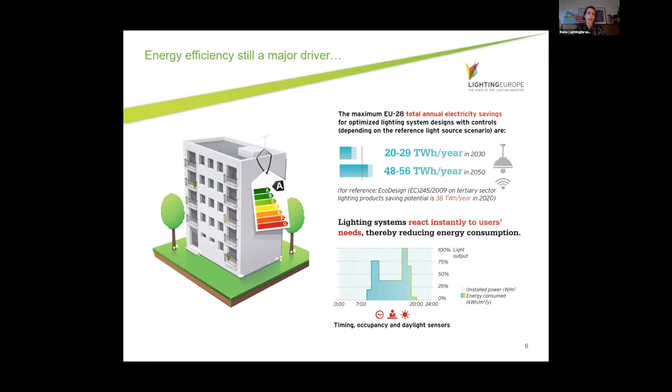But we need to go beyond energy savings, clearly, because in this industry, we have today the science that demonstrates the biological impact of lighting. We know that our circadian rhythm, our body clock, is timed to cycles of light and darkness. And we know that we have the technologies and the products that can deliver those kind of biological benefits also indoors. Now, how to do that, I agree with you, is not always easy, but in LightingEurope, we're convinced that human-centric lighting fostered by intelligent lighting systems will be the next thing for office buildings also. And we expect to see an increased focus on indoor environmental quality.

So it all takes some effort because there is no one size fits all. There's no amazing recipe that everybody can just take and apply in any given space. Good lighting setup really depends on the application and the actual environment we're in. There is a standard for office lighting, the EN 12464-1, which sets out the relevant parameters and minimum requirements for lighting, looking at color rendering, horizontal and vertical illuminance, the uniformity of that illuminance, glare, and color.

And in LightingEurope, we have really long discussions about what is good lighting, frankly. It's really not an easy one, because we agree that at its core, it addresses the basic issues of safety, of the requirements of the task that's performed in a space, and the needs of the occupant. So when designing good lighting for an environment, we think you need to take the following parameters into account: the light levels and the distribution, the quality of the light source. You need to introduce lighting that is tuned and tunable. You need to introduce controls to allow people to personalize the lighting. And you need to also take into account the actual daylight in that environment and work with it.

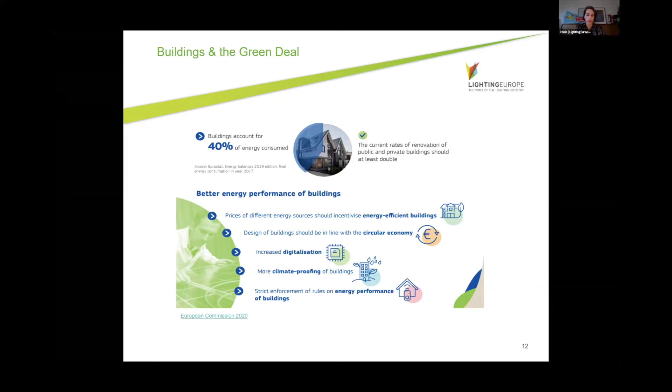Now, last but not least, one more thing we need to, I think, acknowledge is that office spaces will also be driven in the future by desire to create a space that is safe, where people can collaborate and coexist with a minimum risk to their health. And so going beyond general lighting, we need to also think about how UVC disinfection technology is a key element in the integral design of these safe spaces. It's a mature, established technology. It's been around for over 100 years, and it has been proven to inactivate, without exception, all the bacteria and viruses it has been tested against, including SARS.

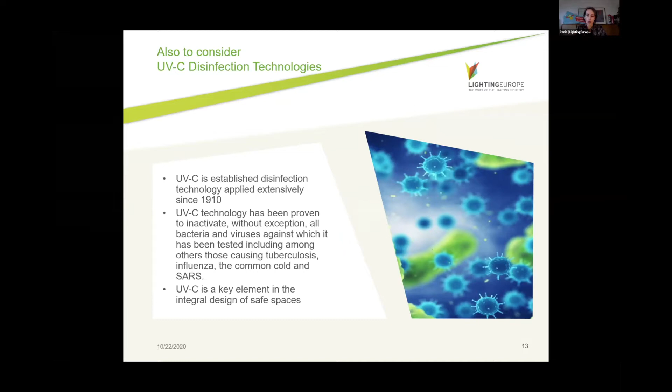So if I were to summarize, in LightingEurope, we think that the future of office lighting will be driven by energy efficiency, but there is a clear acknowledgement that we must go beyond, and we must deliver environments that people enjoy working in, existing in, and that they thrive in. So there is a big potential there for intelligent lighting systems and human-centric lighting. There are policies that are pushing for renovation and are pushing for a transition away from the conventional lighting to LED technologies and systems. There's standards there. They set minimum requirements. Let's work together to improve these, and let's design spaces that go beyond those minimum requirements.

And we also have to acknowledge that safe spaces where people can coexist and not be afraid of catching COVID or even the common flu one day soon will be a big element driving the future of lighting in offices.

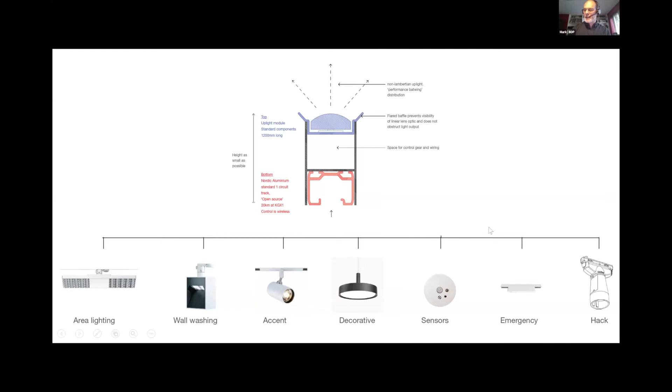And then just a little bit of techie stuff at the end. I think with the sustainable economy thing, we're going to be looking for plug-and-play solutions, which allow us to put a variety of toolkits into flexible infrastructure that allows us to reuse luminaires at end of life very, very simply. So I think it's evident that to apply any of these solutions, the contribution of LED and luminaire manufacturers is going to be vital to provide the tools that we need as designers to ensure that our vision and our clients' needs and desires are implemented.

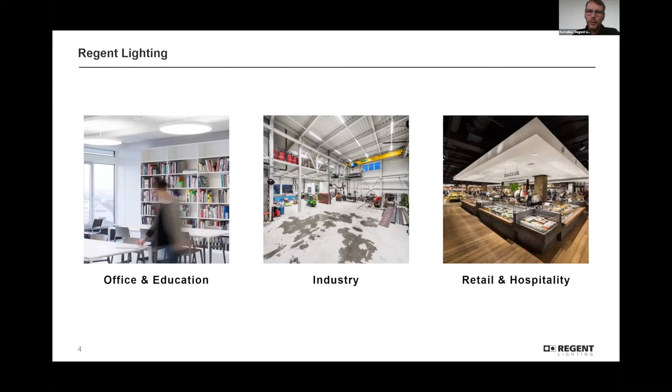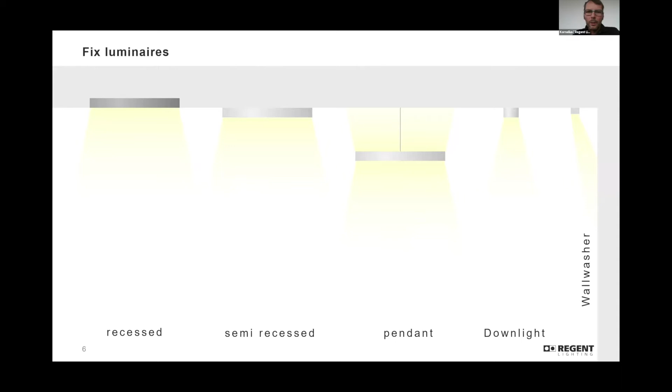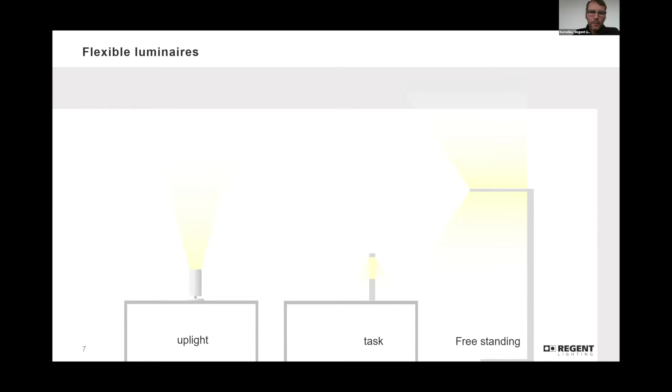So what fixtures work best in office environments? In a very simple approach, we can divide between fixed and flexible luminaires. Here we see a range of fixed luminaires: recessed, semi-recessed, pendant, as we have also seen, downlight and wall washer, for example. In the flexible section, we see on the right a freestanding luminaire providing light in both directions. In the middle, a minimalistic task luminaire, and to the left, a very powerful uplight.

So what solutions address the office needs? For us, solutions should be personal, smart, and of very high quality. So what is behind these words?

Personal means to have a strong focus on the user's needs. For example, to have a light even tailored down to the individual, improving and enriching his personal experience of each activity. Smart means the use of sensors, the cloud, data analytics, and algorithms for helpful new products and services.

And high quality is a very big field. It starts with fulfilling, of course, the norms, like lux levels, glare. But then very important is an aesthetical design concept, which is in our case very much related to architecture. It's very important to have an intuitive user interface to control these more and more complex functions of a luminaire. And of course, it should be a sustainable concept for the implementation of the construction.

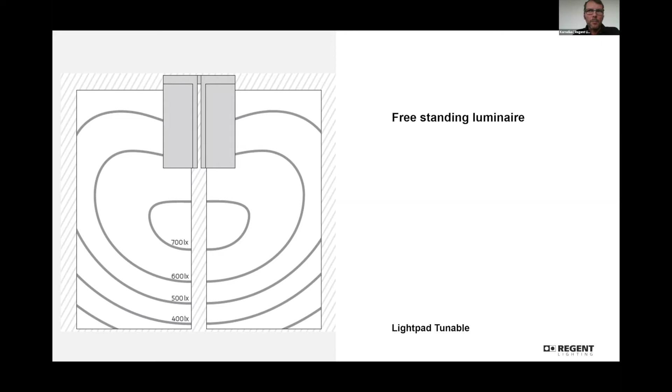Here we see two flexible luminaires, freestanding flexible luminaires. The luminaire concept is based on a modular light panel. So this panel can be clustered on one lamp mast in 1, 2, 3, or 4 combination, thus saving resources and also visual space. These modular light panels provide a double asymmetric, highly sophisticated beam, which enables a user-specific light.

Here we see an office landscape equipped with these freestanding luminaires, in this case with a tunable white version. And this tunable white version is controlled by an intuitive graphical app. So it's possible to adjust for each user the illuminance and the color temperature between 2700 and 6500 Kelvin. And it's also possible to choose dynamic light scenarios, for example, following the daylight, or even go into more personalized scenarios.

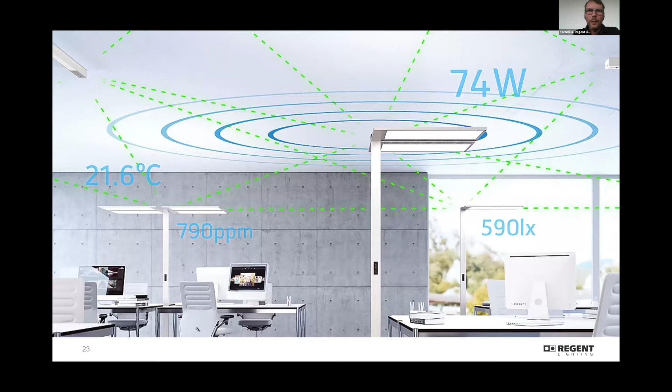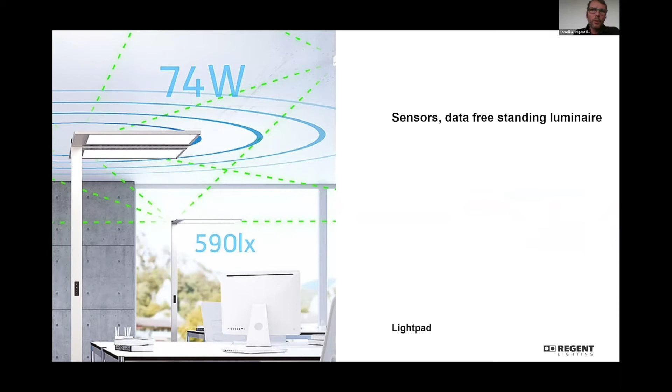Here we see these freestanding luminaires connected via the cloud. There are integrated modules for sensors, cloud, and intelligence. So those sensors measure the room climate. They measure the illuminance on the table, the user presence, temperature, the CO2 equivalent, and the TVOC, which also defines the air quality. The measured data is then connected through the cloud, and in a dashboard, the whole data can be visualized.

What can be helpful applications for this data? Some examples: of course, with such a system, it's very good to save energy through presence and luminance sensors. Then there is a Find My Place option, which is offered for example in desk-shared offices. And we now also have a cleaning option. So the office tables which have to be cleaned can be marked. Or, of course, the facility manager can use this data to optimize the whole procedure or the office layout. There are more use cases coming up, which all go with this data.

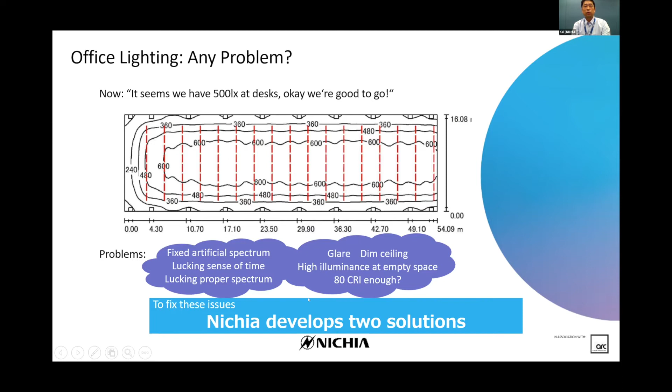Thanks, Gio. Let's talk about office lighting. Have we seen any problem with office lighting? By now, lighting designers simulate illuminance and they say, well, it seems we have 500 lux at desks. Okay, we are good to go. All set. But design based only on desktop illuminance has veiled and unveiled problems, such as fixed artificial spectrum leading to a lacking sense of time and maybe lacking proper spectrum, strong glare, dim ceiling, high illuminance in empty space, 80 CRI. To fix these issues, Nichia develops two solutions.

The first one is the circadian tune. We have a lot of buzz around human-centric lighting, but most human-centric lighting currently existing changes CCT only. This solution can change not only CCT, but also melanopsin stimulation at each moment. Hereafter, I may say MR or melanopic ratio for the melanopsin stimulation. Let's take a look at the LED spectrum we are offering. This is the LED spectrum curve, and this green line is the visual sensitivity curve for humans, which relates to how bright human beings feel light. And this blue line is the ipRGC curve, which relates to activation and awakeness.

Higher MR means more of the spectrum is in this curve. The LED industry, however, has very much focused on the visual sensitivity curve because our number one priority had been energy savings. We understand energy savings are very important, but we are now also focusing on the ipRGC curve and a high melanopic ratio, especially in the morning and daytime. And besides that, we are also interested in low MR at low CCT, which will happen in the evening.

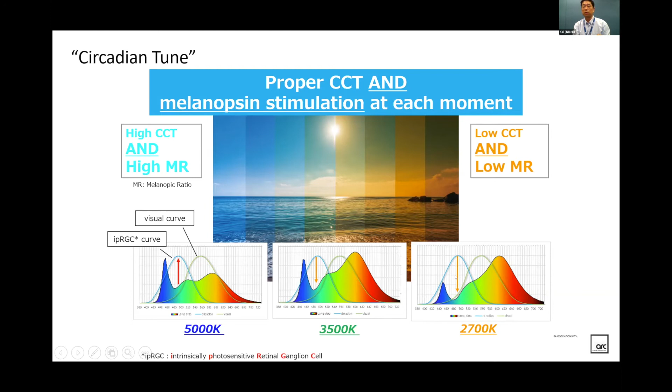This slide shows the technology. The horizontal axis shows the CCT, and the vertical axis shows the MR. The black line here is the standard light. The pink line is the new circadian tune. Nichia develops this cyan color with Nichia's original blended phosphor. This cyan LED creates a high level of melanopsin stimulation. This combination of cyan LEDs and 2700 Kelvin LEDs creates high MR at high CCT and low MR at low CCT. High MR leads to activation, such as reduced fatigue, good visibility, and awakening. And low MR creates relaxation, such as feeling safe and inducing sleep.

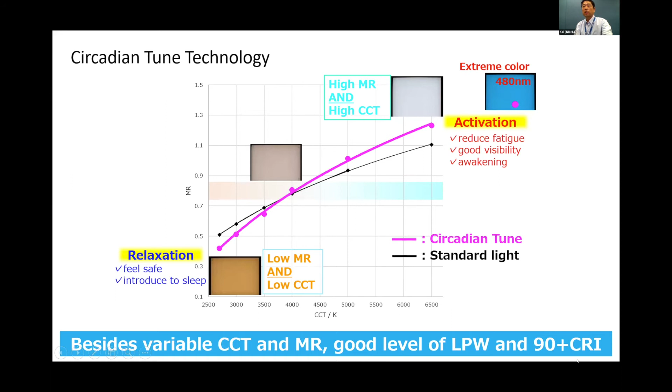Besides variable CCT and variable MR, this system can also achieve a good level of efficacy and 90 plus CRI. This is the demonstration movie, starting from the cyan color, now mixed with the 2700 Kelvin.

Now it's a white 10,000 Kelvin, and now it's 8,000 Kelvin, which emulates the cloudy sky, and still it is maintaining the high MR, 1.34. And now white is down to 6,500 Kelvin, and you can see a very high level of the melanopic ratio. And white is now at 4,000 Kelvin, which is used in Europe, and the melanopic ratio is 0.81.

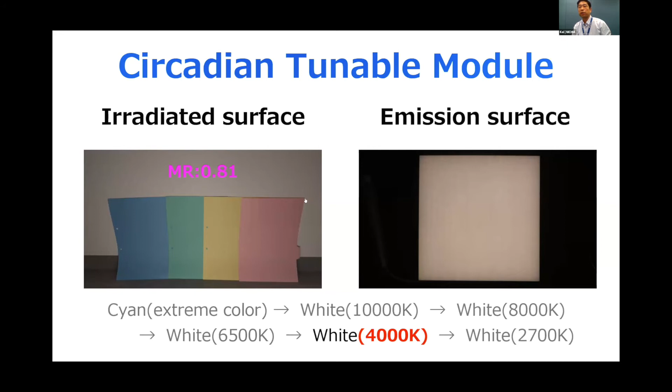This is the same level as the standard light. And this 0.81 is still higher, 25% higher compared to the conventional 80 CRI LEDs. So 25% higher than the conventional LEDs. Now the fixture is down to 2700 Kelvin, and you can see the very low level of the melanopic ratio. So not only having a sense of time, you can also have proper melanopsin stimulus at each moment. This kind of circadian tune is our first proposal for office lighting.

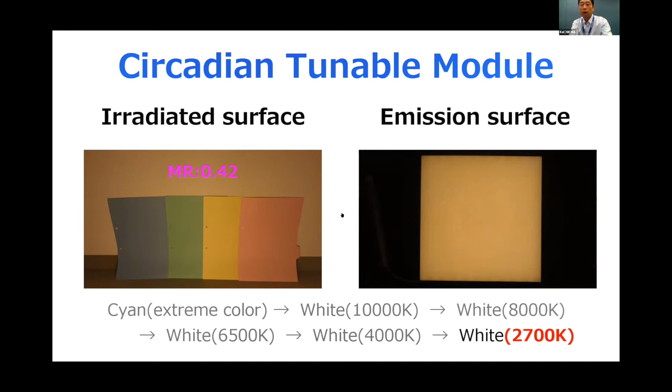Let's move into our second proposal. The next technology is task and ambient. Nichia offers a variable light distribution system with the 3S light engine. With this system, we can make one single task and ambient lighting fixture. This kind of variable light distribution can offer both focusing and relaxing.

It used to be that this kind of variable light distribution lighting fixture needed a complicated mechanical system, and the transition was not so smooth. Unlike traditional systems, Nichia's 3S light engine can offer smooth transition, simple design, and small glare. On the next page, I will explain its technology.

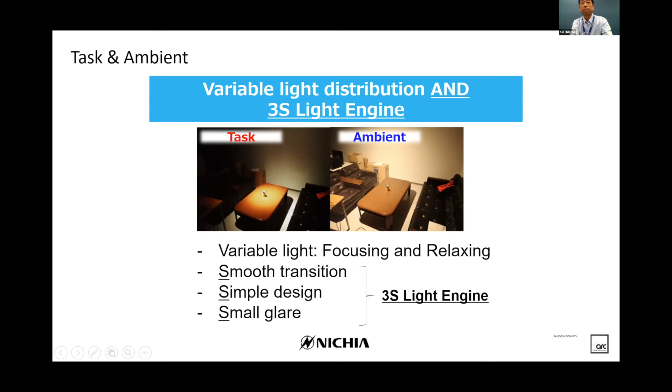3S light engine technology is made with only two major parts. One is the Nichia patented lens, and the other is the LED module. For the narrow beam, centered LEDs and the centered lens are used. And for the wide beam, the surrounding LEDs and the surrounding lens are used. And these systems are switched electrically, which makes a smooth transition of light distribution.

Besides the simple structure, we make these light engines small, such as 30 millimeters for downlight and 42 millimeters for spotlight. Even though we achieve a very narrow viewing angle, such as 15 degrees, we achieve a very tight and small LES, light emitting surface. And with this LES, we can minimize the glare with rather small cones.

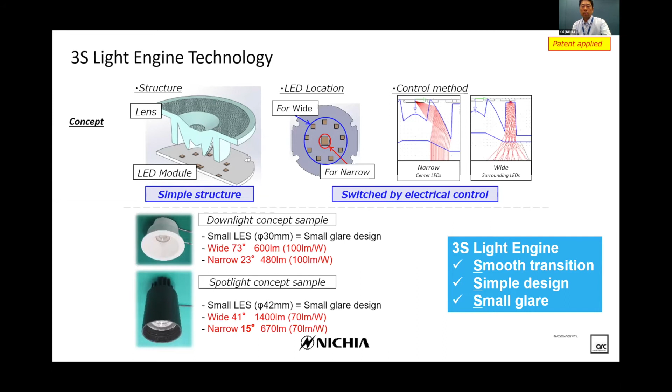Here is a demonstration movie. It starts from the narrow viewing angle. You can see the irradiated surface on the left-hand side. And on the right-hand side, you can see the emission surface of the fixture. And you can see that only the center is emitting.

Now it's a narrow viewing angle. And it is changing to the wide distribution. So you can see the wide irradiated surface and the emission area is the surrounding area. So we offer the 3S light engine for simple designed task and ambient lighting fixtures for proper focusing and relaxing.

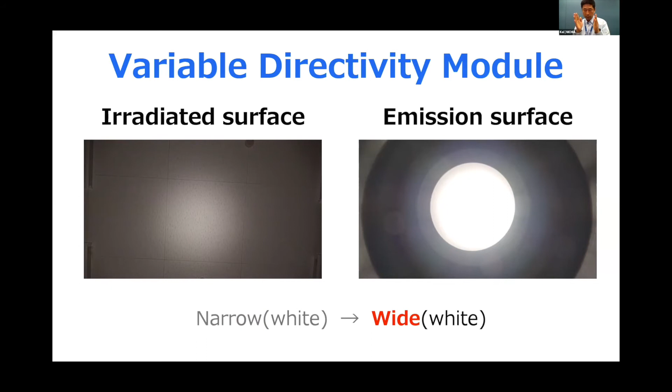Here's my conclusion. Nichia brings two solutions for office lighting. The first one is circadian tunable. Not only sense of time, we offer proper melanopsin stimulus and variable CCT at each moment. The second one is task and ambient.

As we know, task and ambient lighting works well for good focusing and relaxing. Our 3S light engine can help to create task and ambient lighting more easily. It used to be complicated; now it's an easy solution. So I strongly believe the new office lighting can make us more productive and more comfortable.